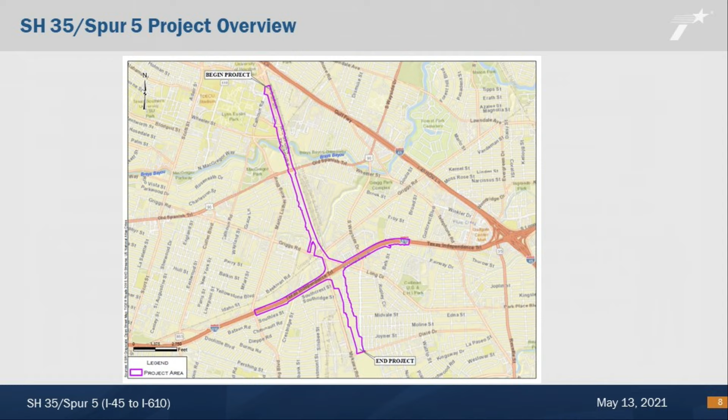Environmental and socioeconomic effects to these parcels were evaluated within the final EIS. Since 2008, the project has undergone design changes, and the limits of the project were reduced from I-45 to Bellfort Street to I-45 to I-610. The construction limits would extend to Dixie Drive to bring the road back down to ground level.

The proposed project and its potential environmental impacts will be evaluated under NEPA as a categorical exclusion, also known as a CE. A CE is an action that has been determined by a federal agency to not individually or cumulatively have a significant effect on the human environment. The roadway design and environmental analysis for this project was initiated in 2020. The proposed project would require the acquisition of approximately 13.5 acres of new right-of-way.

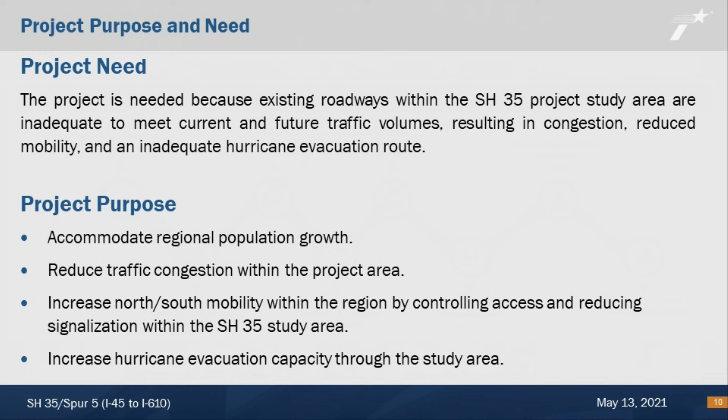The proposed project would consist of a 4 to 10 lane roadway on new location between I-45 and Dixie Drive, with an interchange at I-610. Each lane would be a 12-foot lane. The number of main lanes transitions from 4 main lanes between Dixie Drive and Glencoe Avenue, to 6 main lanes between Glencoe Avenue and Griggs Road, to 10 main lanes between Griggs Road and Old Spanish Trail, and back to 8 main lanes between Old Spanish Trail and I-45.

The SH35 I-610 interchange would consist of an elevated multi-level interchange between SH35 and I-610. SH35 would be elevated over I-610. 4 elevated direct connectors, each consisting of one 14-foot lane, would be constructed to permit entrance and exit to both SH35 and I-610. A direct connector is an elevated ramp that provides a direct connection between 2 roadways.

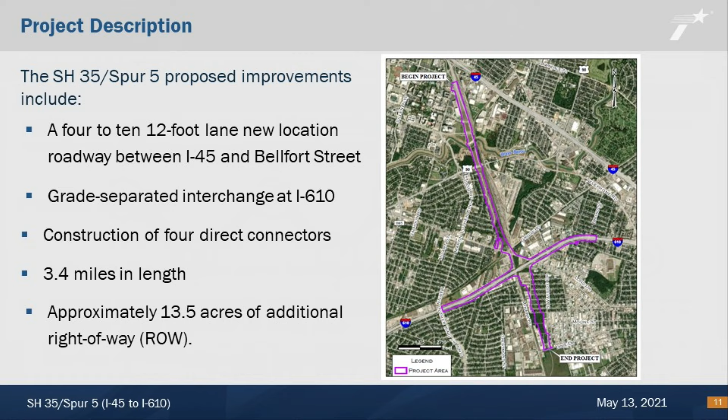Direct connectors will be constructed from SH35 southbound to I-610 eastbound, SH35 southbound to I-610 westbound, I-610 westbound to SH35 northbound, and I-610 eastbound to SH35 northbound. The project is approximately 3.4 miles in length and would require approximately 13.5 acres of additional right-of-way.

The proposed project would be a new location roadway incorporated into the existing Spur 5 segment from I-45 to Old Spanish Trail, which is also known as US 90A. The existing Spur 5 from I-45 to north of University Drive consists of 2 12-foot main lanes in the southbound direction, 2 to 4 12-foot main lanes in the northbound direction, and 2 12-foot frontage roads in each direction.

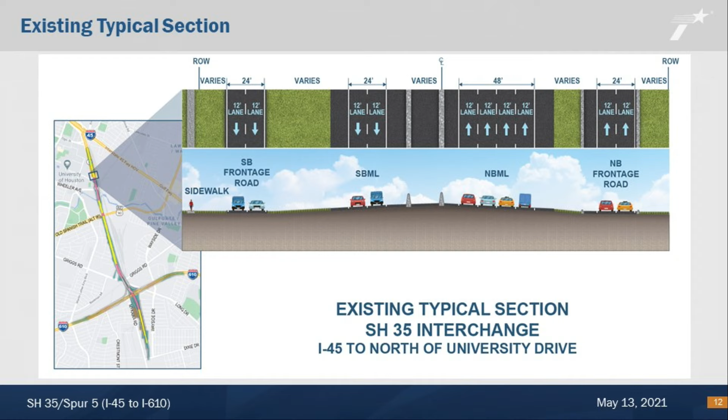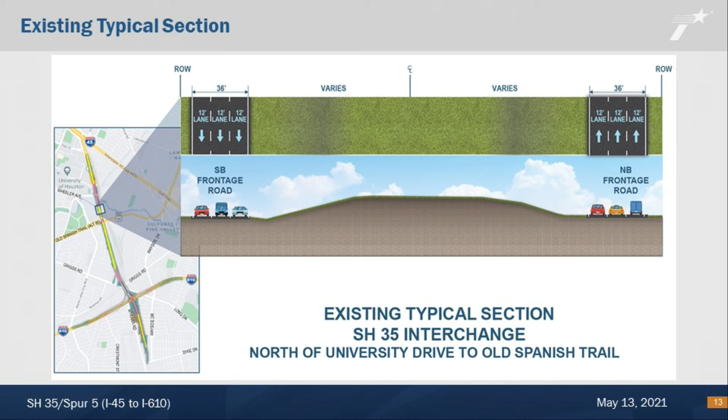The existing Spur 5 from north of University Drive to Old Spanish Trail consists of 3 12-foot frontage lanes in each direction. The right-of-way within this section varies from 310 feet to 350 feet. From Old Spanish Trail to Dixie Drive, the remainder of the proposed project has not been constructed and consists of new location roadway. The areas of proposed new location roadway consist of vacant land, wooded areas, residential, and industrial properties.

Major public infrastructure and utilities are located throughout the SH35 project study area, including roadways, railways, electrical and transmission lines, and petroleum pipelines. Prominent roadways within the project study area include Mykawa Road, I-45, and I-610. The HB&T and the BNSF Railway run parallel to the proposed project.

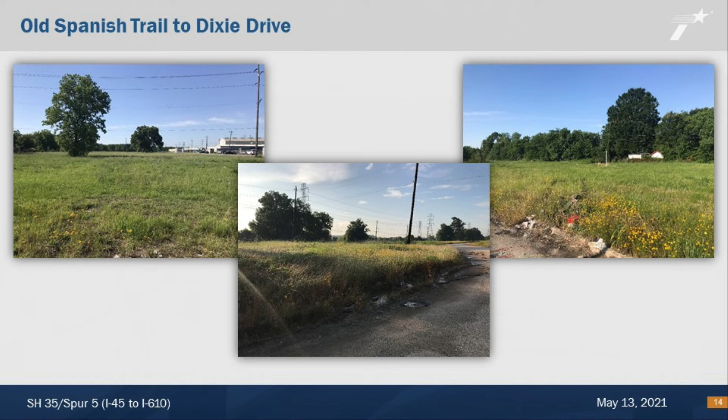Bicycle lanes are not proposed within this portion of the project. However, bicycle lanes are proposed by others along Martin Luther King Drive to Old Spanish Trail and would connect to bicycle paths at Brays Bayou.

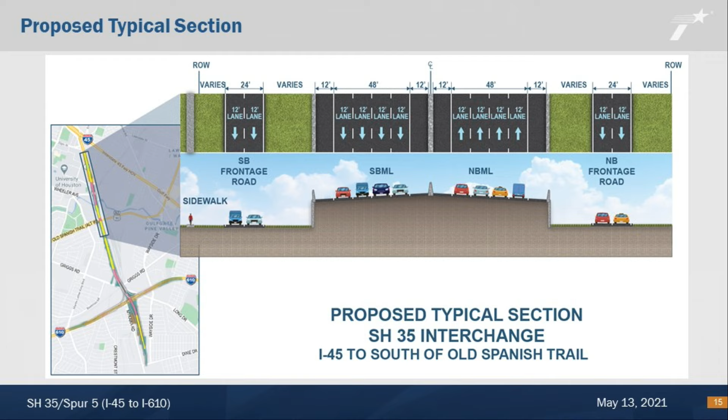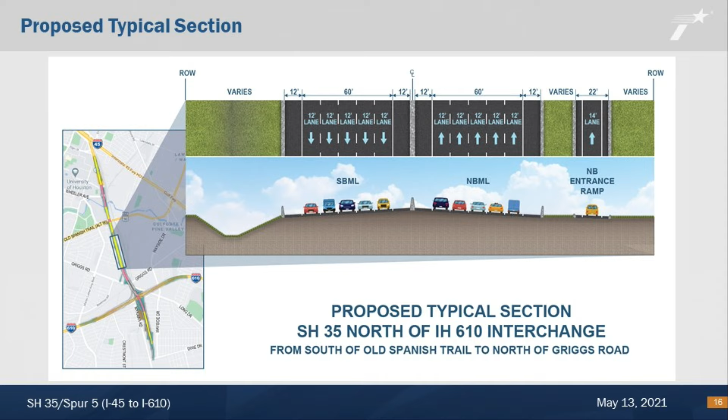This typical section shows SH-35 north of the I-610 interchange. In this segment, SH-35 consists of 6 12-foot elevated main lanes, 3 in each direction. The elevated lanes you see to the left and right of the elevated SH-35 main lanes are the direct connectors that would connect SH-35 to I-610 and connect I-610 to SH-35. The direct connectors would each consist of a 14-foot main travel lane with a 4-foot inside shoulder and a 14-foot outside shoulder.

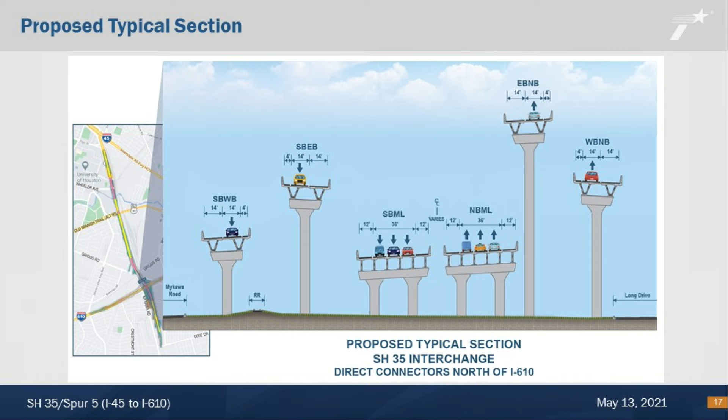This typical section shows the area from Glencoe Avenue to north of Dixie Drive. SH-35 in this section would consist of 4 12-foot lanes, 2 in each direction, with 12-foot inside and 12-foot outside shoulders. The southbound frontage road in this section would consist of 2 12-foot lanes. A 10-foot wide shared-use path would be constructed adjacent to the southbound frontage roads.

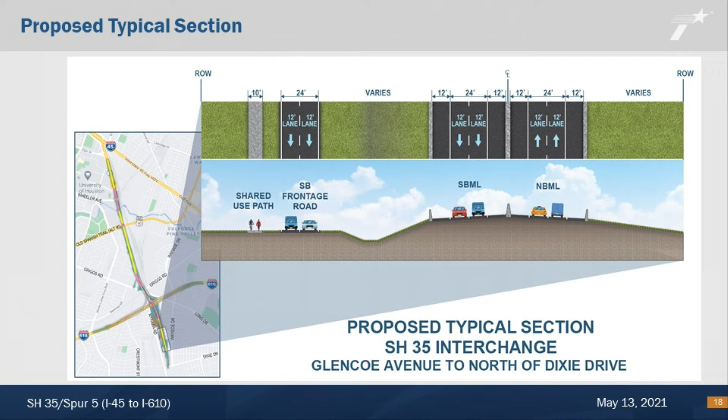Here is a screenshot of the legend for the schematics that you can find on the webpage. These legends are included on each page of the schematics so you can reference it as you review the schematics. The screenshot on the right shows the colors that fill the proposed design. These colors identify the limits and major aspects of the project.

Let's walk through them. The yellow color identifies the main travel lanes on SH-35. Their frontage roads are identified in light gray. In between the main lanes and frontage road lanes will be areas of blue, which are the entrance and exit ramps. Lastly, areas in dark pink color identify concrete bridges, and small areas of dark gray are steel bridges.

The screenshot on the left shows the various types of lines that you will see. Of particular note are the black lines that outline the main lanes, the blue lines that outline frontage roads and ramps, the thin black dashed lines that indicate existing right-of-way, and lastly, the thick black dashed lines that indicate proposed right-of-way.

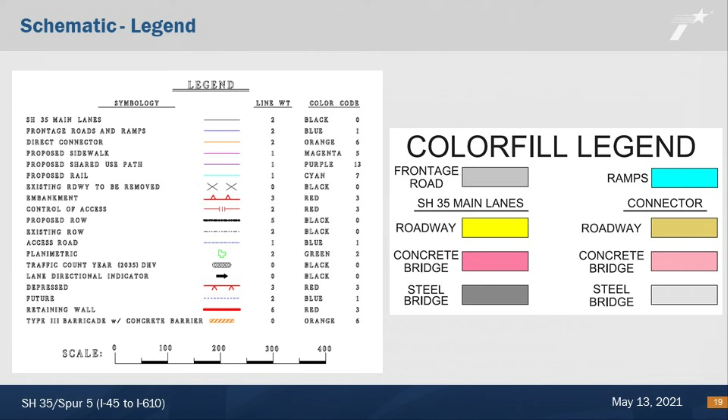Here is a detailed look at a portion of the schematic, or design drawing of the project. This slide shows SH-35 from south of I-45 to Brays Bayou. The yellow lines on the plan identify the main lanes, and the blue lines identify the auxiliary lanes. The pink lines identify areas where SH-35 would be elevated over Wheeler Avenue and Brays Bayou.

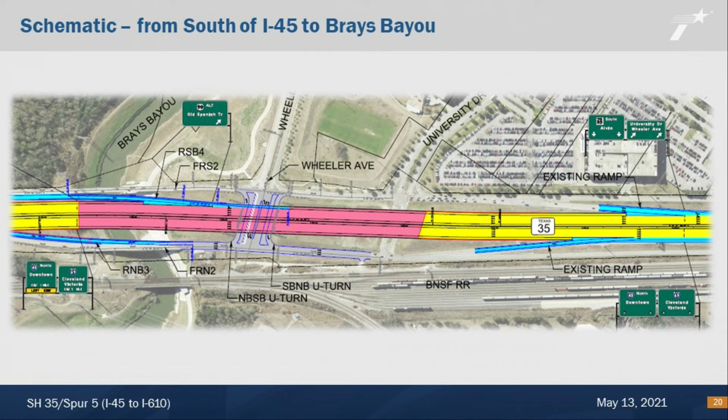Here is a detailed look at the schematic at the SH-35 I-610 interchange. The travel lanes that you see in orange are direct connectors. Direct connectors would allow vehicles to travel on elevated lanes to connect from SH-35 to I-610 and to connect from I-610 to SH-35. This project includes the construction of 4 direct connectors. The red travel lanes show where SH-35 would be elevated over I-610. The thin blue lines that are shown crossing under SH-35 indicate the location where roadway projects are proposed by others.

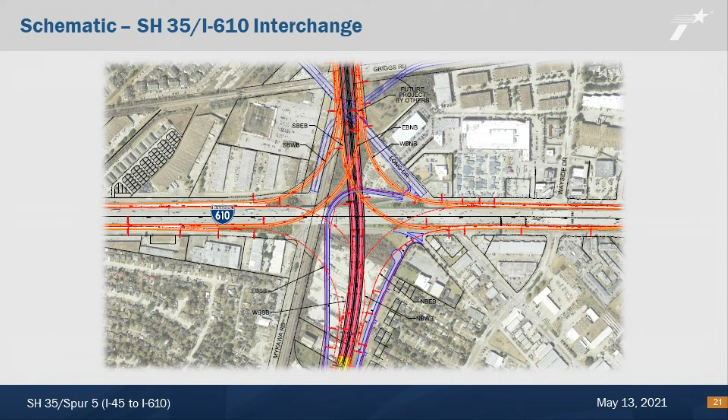Here is a detailed look at the schematic from south of I-610 to north of Dixie Drive. The yellow lines on the plan identify the main lanes, and the blue lines identify the northbound and southbound ramps. The light gray lines identify frontage roads, and the thin purple lines identify the shared use path. The ramps shown in blue depict how the main lanes would transition to northbound and southbound ramps connecting to Dixie Drive. The southbound ramp ties into the southbound frontage road, which continues to Dixie Drive.

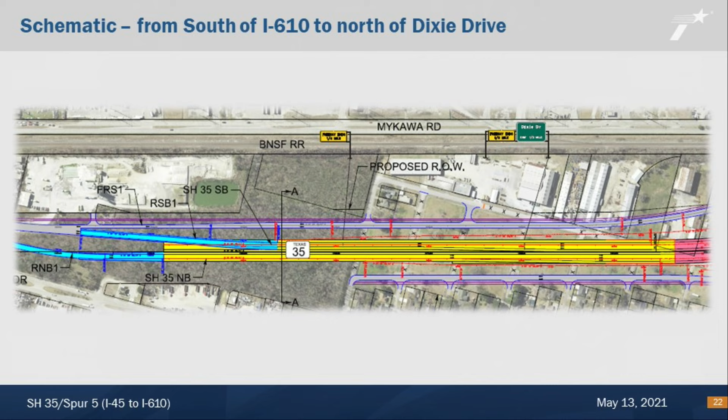The southbound frontage road would consist of two 12-foot lanes and would be one-way, southbound only. The northbound ramp consists of two 12-foot travel lanes from Dixie Drive and transitions directly into the northbound SH-35 main lanes.

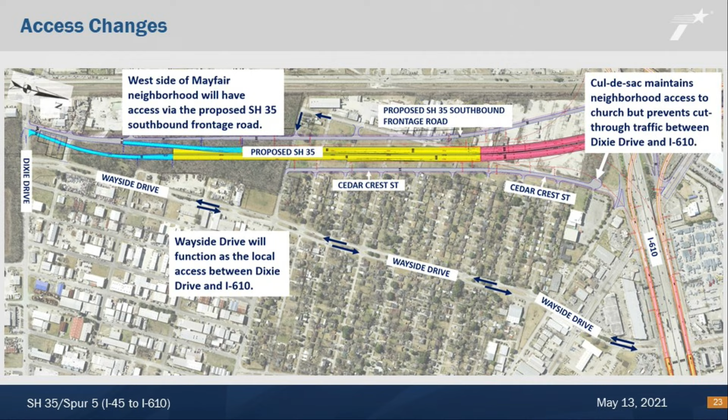The proposed project is consistent with the Houston-Galveston Area Council's 2045 Regional Transportation Plan for the 8-county Houston-Galveston region and the 2021-2024 Transportation Improvement Program. The proposed project will be funded with a combination of federal and state funds for a total of approximately $300 million.

The project team is in the process of identifying and evaluating potential environmental impacts of the proposed project. Areas being reviewed include community impacts, cultural resources, biological resources including threatened and endangered species, water resources, hazardous materials, and traffic noise. The traffic noise analysis will be conducted in accordance with state and federal guidelines to determine if the project will result in a traffic noise impact.

If there is a traffic noise impact, noise barriers would be analyzed to determine if they are reasonable and feasible. If noise barriers are proposed for the project, a noise workshop would be held for property owners adjacent to any proposed noise barriers. The project will be designed to avoid or minimize impacts to the greatest amount practicable. The technical reports documenting the analysis and conclusions of these studies will be available for review on the project webpage once completed.

Approximately 13.5 acres of additional right-of-way would be required for the proposed project, and it would potentially include 4 commercial displacements. No residential displacements are anticipated. TxDOT offers relocation counseling and financial assistance to residences and businesses that are displaced by the acquisition of highway right-of-way in accordance with the Uniform Relocation Assistance and Real Property Acquisition Policies Act of 1970. TxDOT would provide assistance to potentially displaced businesses and residences.

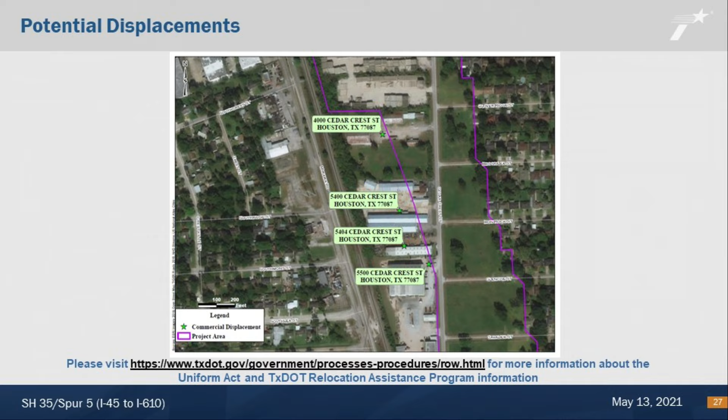The 4 potential commercial displacements are shown on this figure. Potential displacements would be confirmed during final design. Information about the TxDOT Relocation Assistance Program concerning services and benefits for displaced persons and businesses can be found on the TxDOT website at https://www.txdot.gov/government/processes-procedures/row.html.

We want to highlight the estimated project timeline. Look for the pink "We Are Here" arrow at the bottom left of the slide. This virtual public meeting is being held to present the proposed project and gather public and stakeholder input. After the comment period closes, TxDOT will review the comments received and prepare a virtual public meeting summary report. The summary report will be posted to the project webpage approximately 3 months after the close of the comment period.

The next steps include refining the schematic and further evaluating environmental impacts. Provided the environmental documents and processes are approved, the project would then move into detailed design and right-of-way acquisition could begin. The proposed project would be constructed in phases. Construction on the initial phase would begin in fall 2022.

The first phase would be SH-35 from I-45 to Griggs Road, and the frontage roads from Long Drive to Dixie Drive. The next phase would be the SH-35 main lanes from Griggs Road to Dixie Drive. The final phase would be the 4 direct connectors at the SH-35 I-610 interchange. The project team anticipates that construction would take approximately 3 to 4 years.

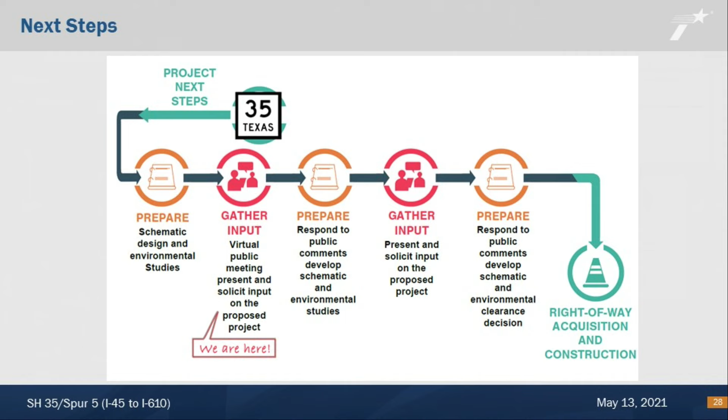The project webpage contains all materials presented in this virtual public meeting, including this presentation in both English and Spanish, exhibit boards, a comment card, a project fact sheet, and the schematic. The schematic layout provides a more in-depth look at details in the existing and proposed right-of-way. These files are large and may require more time to download than the other project materials.

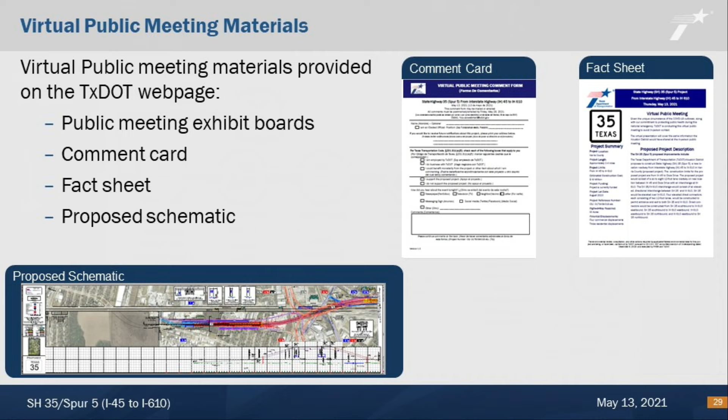TxDOT encourages you to review the materials posted on the virtual public meeting webpage and to provide written comments. The comment form is located on the meeting webpage. Comments must be received via email or mailed and postmarked by Friday, May 28, 2021 to be included in the official virtual public meeting summary report.

You can submit comments in the following ways: via email to hou-piowebmail@txdot.gov, via mail to the TxDOT Houston District, Attention Advanced Project Development Director, P.O. Box 1386, Houston, Texas 77251-1386, online by visiting www.txdot.gov and searching the upper right-hand search box for SH35/Spur5 from I-45. Click on the email link at the bottom of the project page to open the comment form.

Again, responses to comments received during the comment period will be included in the virtual public meeting summary report that will be posted on the project webpage approximately 3 months after the close of the comment period. The project webpage is www.txdot.gov, keyword search SH35/Spur5 from I-45. Please do not hesitate to contact us with any questions. Feel free to contact the project engineer at the Houston District Office at 281-841-6888 at any time during the project development process to ask questions.